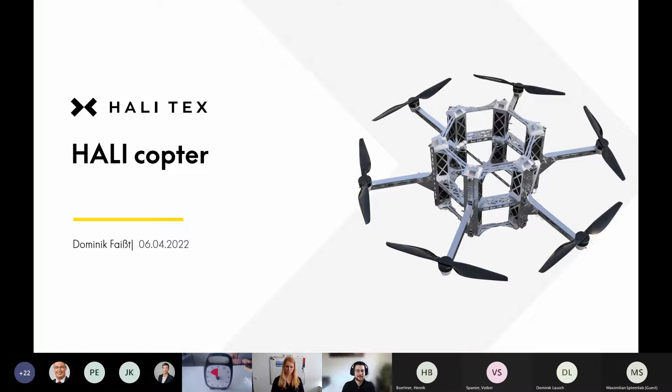My name is Dominik Faißt. I'm a software engineer from Halitex at the Lake of Constance, and we are a small startup which was founded at the end of 2020 in the field of system and process automatization.

Which we could already show by developing a fully automated system for the production of FFP2 masks. However, today I would like to introduce you to our new project, where we want to redefine the previous limits of drones. And according to our company name, we call this project the HALI copter.

But before that, I would first like to ask a question: what is a copter? A copter is a drone, an unmanned aerial vehicle, which is characterized by the fact that it can, if done right, autonomously perform tasks in the air or be controlled by a person from the ground. Most of you will be familiar with drones mainly in the form of multicopters, like you can see here, and in recent years those have also been enjoyed by private users and hobby pilots.

They usually consist of a main body, including the power supply and the control electronics of the system, as well as several arms to which the motors and rotors are attached. Centrally below the copter, a payload can be attached, which is a camera in most cases.

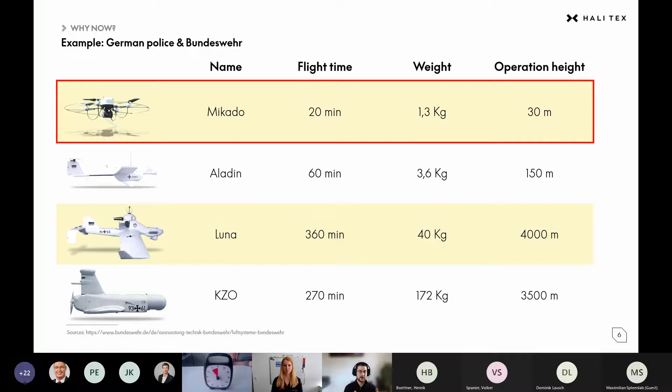However, for a price several times lower than the other systems, you get a platform that is ready to use within just 5 minutes and almost completely free of maintenance. To compare this to the other drone systems, I brought official video footage from the Bundeswehr.

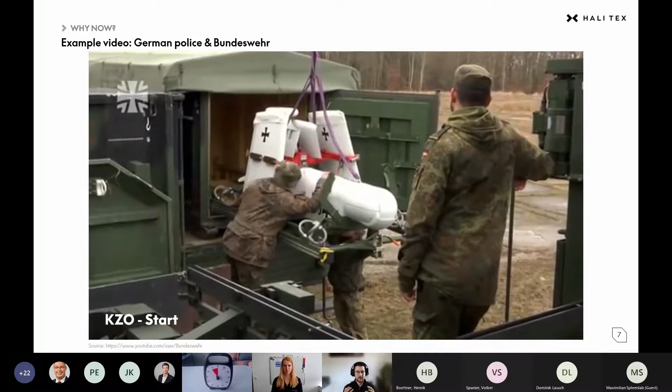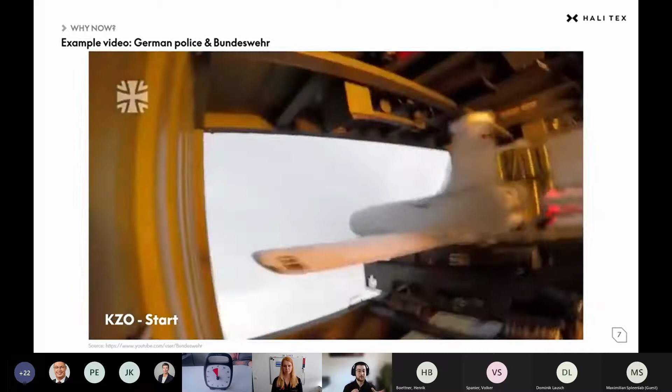What you can see here is the assembly of the KZO drone for the mission, which has to be done by a team of at least 4 men. Since the 170 kilogram drone is not able to take off on its own, it's shot out of a container with the help of a booster, which you can see here right now. This booster is not enclosed in the system, and therefore it has to be collected and refilled after use.

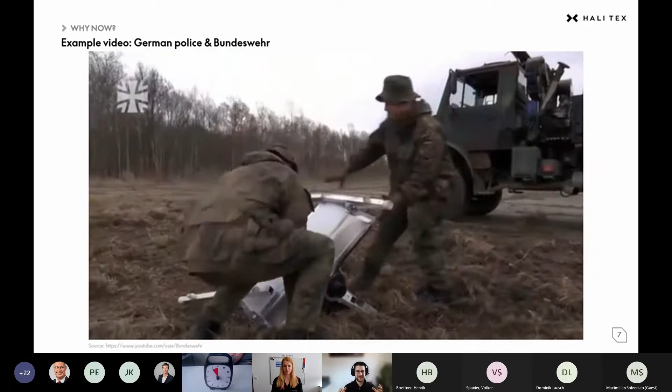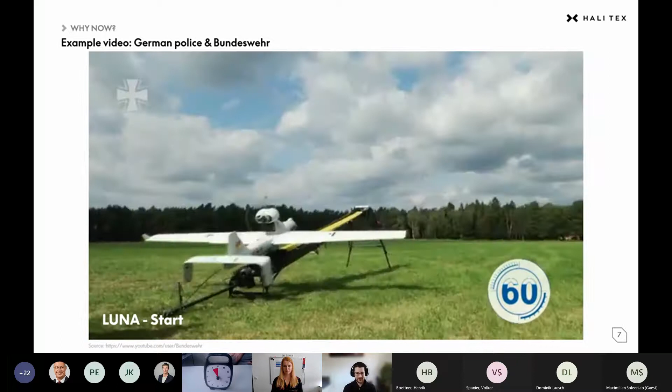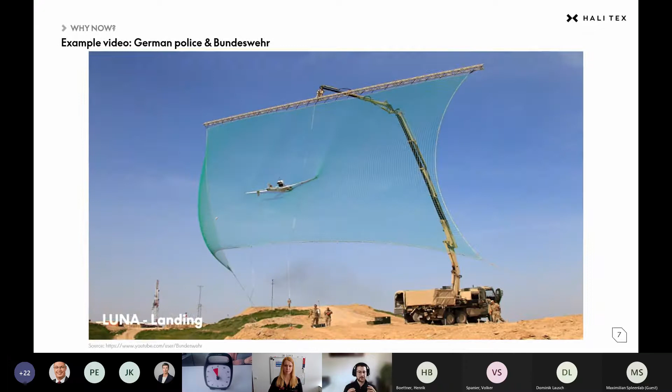The Aladin drone can be launched by a soldier from the hand, while the Luna drone needs a launch ramp. For landing, parachutes in combination with airbags on the underside of the drone are used, as well as huge safety nets. So while landing, it often happens that parts of those drone systems break and have to be repaired afterwards.

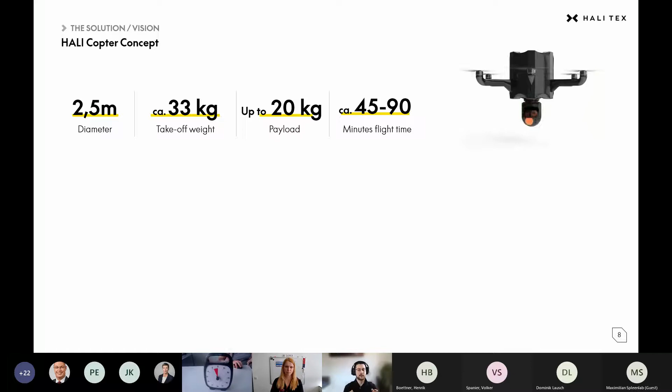The batteries and electronics are integrated into the supporting structure of a carbon monocoque, which you can see on the right side here. This monocoque also allows us to store the payload, such as a camera, inside of the monocoque in a safe position. In flight, the payload can automatically move under the copter, ensuring an absolute unobstructed field of view.

To enable autonomous operations of the drone, it must have comprehensive communication capabilities, and for this reason it is equipped with 5G and GPS. As alternative communication technologies, directional radio antennas and satellite link are included. In addition, a 360-degree LiDAR scan is used to detect objects and obstacles in the possible flight path.

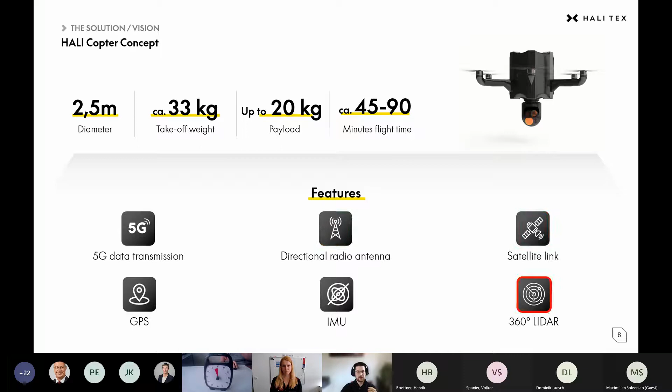To enable reliable supply and easy support of the transport of the drones, we are currently working on a concept in which a roll-off container system will be integrated as a mobile base for the copter operation. This has the advantage that roll containers are already in use by several emergency services such as the fire department and the police, and enable our own infrastructure, with which I mean communication possibilities and energy supply.

The copter is placed on a platform within the container, which serves as a lift and a landing platform as well. Next to the copter, a 6-axis robot arm is installed, which enables the autonomous exchange of battery packs and different payloads.

Therefore, the drone is thus ready to use again within a very short time after landing without the intervention of any human being. To control the drone, a control cabin is set up in which the controller is placed. On the installed screens, the pilot gets live data of the drone displayed, which includes the GPS position and flight data recorded by the inertial measurement unit, and of course the live images of the camera.

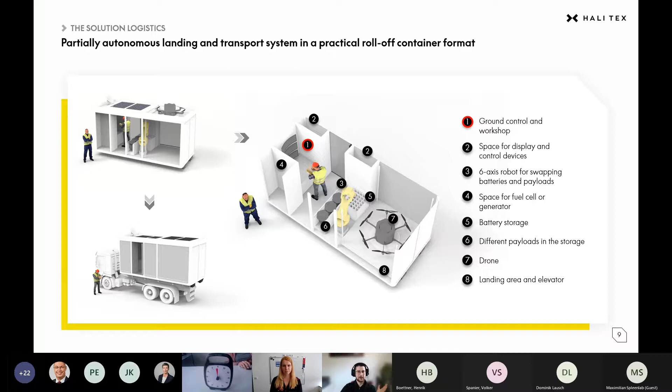Now that you know the concept of the system, you are probably asking yourself how far the progress already is. So in order to verify that the copter can actually deliver the theoretical performance, we have already built a prototype of aluminium, which you can see on the right side here.

Together with the batteries, which are shown below, the prototype exceeds the target weight of the carbon copter by 19 kilograms, which is equal to 19 kilograms of payload. During a secured test flight, a flight time of 47 minutes was achieved with that setup, which means that with a non-optimized prototype, we already outperformed most of our competitors in terms of flight time and payload.

The next steps are now to manufacture a carbon prototype and see if the targeted 90-minute flight time can be achieved with a lower payload. Furthermore, the development of the container system has to be started, and for this we also still look for partners and possible investors.

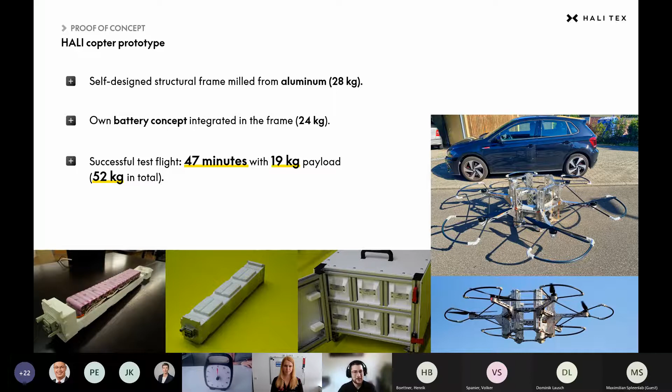Thank you, Dominik. Just in time. So now, please share your questions in the chat if you have questions for Dominik. Also, it's in the chat, all right. I'm also here for the whole lunch break, so you can also ask me while the other presenters talk.

No questions yet in the chat. Oh, here's the first one.

Looks very interesting, but what is really unique in your product in one word? I would say just usability, because we try to get the highest possible payload and also a much longer flight time than other systems, and this enables you to use it for more applications. So usability. And also, we aim to deliver a full system, so we don't just want to give a drone to the market for you to figure out what to do with it, because when we have customers like the police or the military, the container system should be fully unique. It's an ecosystem of its own, which can be controlled from the mobile central alone or from other centrals of the police or whoever wants to use it.

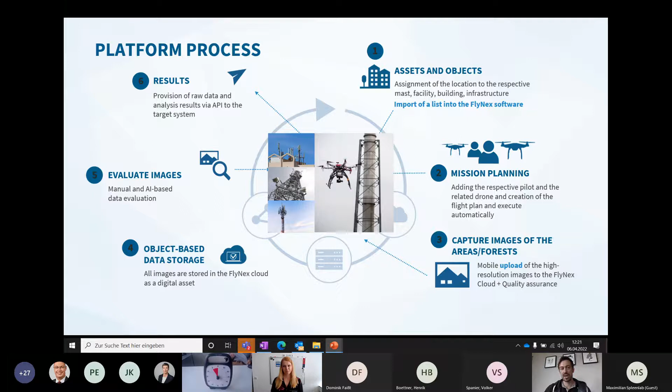Then, of course, you have to fly. We have seen a very interesting technology before - there are a bunch of drones which you can access nowadays, and you fly and take the pictures or video. Then you upload this either through an all-in-one FlyNex solution or by hand to the platform.

And that's now where we come into play. The first thing we do is make sure that all the images or videos you take are GDPR conform, which means you have to get rid of the faces in case you want to share the results. It also means getting rid of number plates on vehicles, which is done in the background or by an action you take in the platform.

Afterwards, once you have uploaded the images, you have to evaluate them. There you have two different ways. The first way is you can, of course, use an all-in-one solution from FlyNex.

They use our technology to set up what you want to see. But on the other side, which to our point of view is a big strength, and that's why we partnered up, you can also do it on your own. I will tell you one example why this is necessary.

We had one case where we had to analyze a bridge. In this bridge, there were brown parts, and the question was, is the bridge okay or not? It was super difficult, or actually impossible for us to decide if this is moss or if this is really rust from the underlying metal rods.

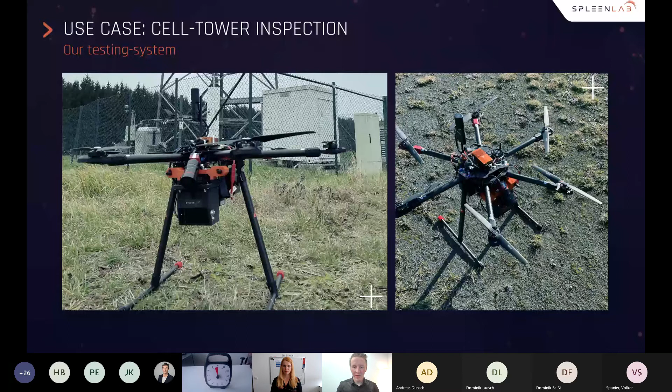That is our system. So now I'll show you real results, which means I will share a video with you. That's a typical flight: the drone lifts off.